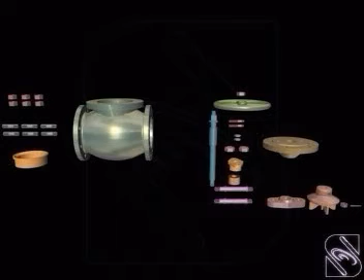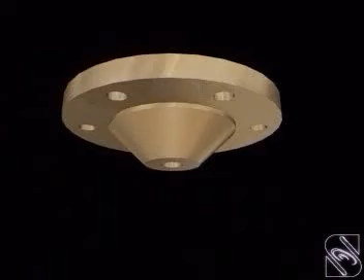Stop valve. Stop valve is used in water and steam pipelines for shutting or opening the fluid flow. The main parts of the stop valve are the body, the valve and valve seat, spindle, packing, gland and the cover.

The packing material is placed in the cover and the gland is then assembled.

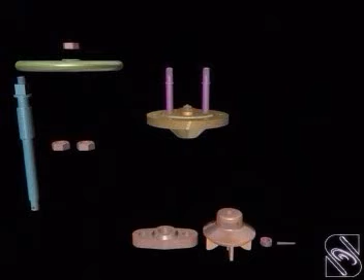The cover is now fastened with the bridge by means of studs and nuts.

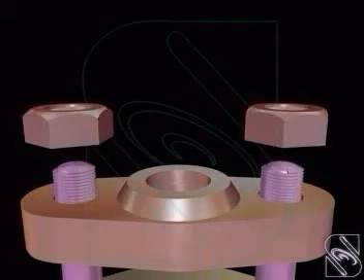The spindle is threaded at one end, which works in the threaded hole of bridge, so that the spindle can be raised or lowered.

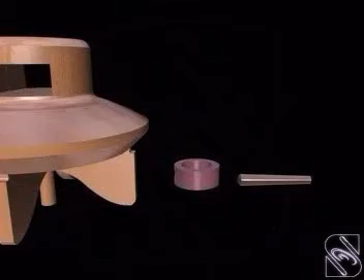The other end of the spindle is stepped to assemble it with the valve. The spindle is inserted through the bridge and the cover assembly. The collar is introduced into the valve slot.

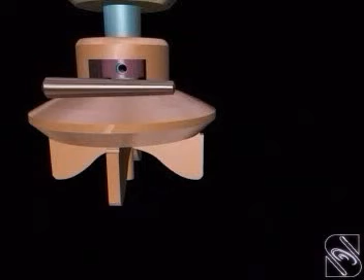The spindle step is inserted into the valve and it is fastened with the collar using the cotter pin. Thus, the spindle will carry the valve along with it when it is raised or lowered.

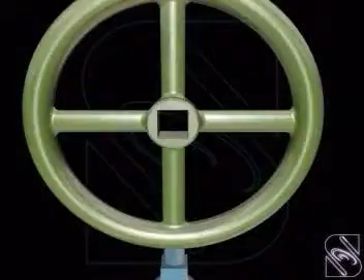At the top of the spindle, the hand wheel is mounted using nut. The square section of the spindle mates with the square hole of the hand wheel.

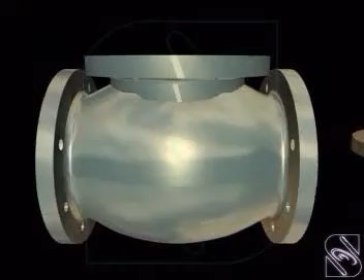The main body is flanged in order to provide connection for inlet and outlet for the fluid flow.

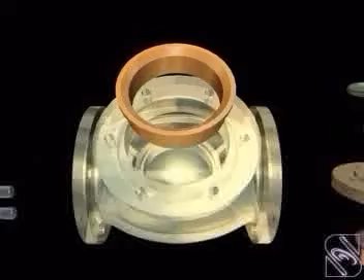The valve seat is fitted with a body. The internal taper in the valve accurately seats the valve seat at its external taper.

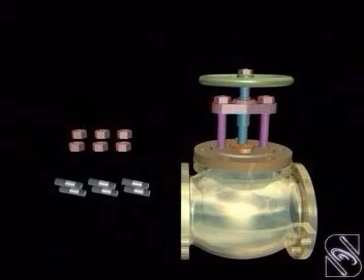The cover assembly is now fastened with the body using stud and nut. By rotating the hand wheel, the valve is lifted off its seat, thus admitting fluid flow from inlet side to the outlet side.